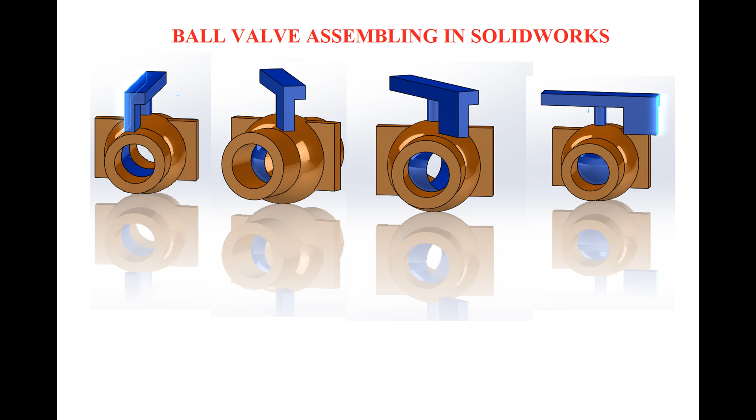Hello YouTubers. Today we're going to be talking about how to construct this valve, this ball valve, in Solidworks.

So I'm showing you how the end product will look like. Here you can adjust by rotating this, adjusting whatever angle you want between 0 degrees, which is fully closed, versus as you open the valve until eventually you get fully open, that's 90 degrees. If you want to adjust something in between, I will show you in the video how to do that.

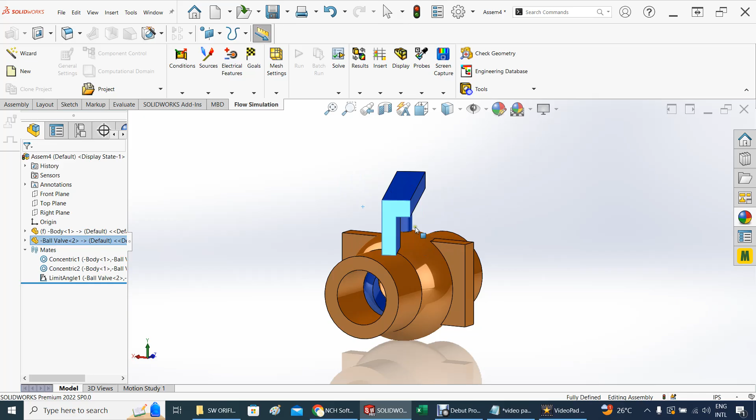But in the meantime, remember that basically we're going to be working on the body, this part here looking bronze, and the ball valve itself, which is the part that you can adjust. So now let me show you how this was done in the video.

All right, so here we are. Let's create our ball valve, and I don't like that background. Let's fix it, plain white. And I'm in inches here, on the front plane.

Let's do a sketch here, and let's do a circle, and that circle should be about 1.5.

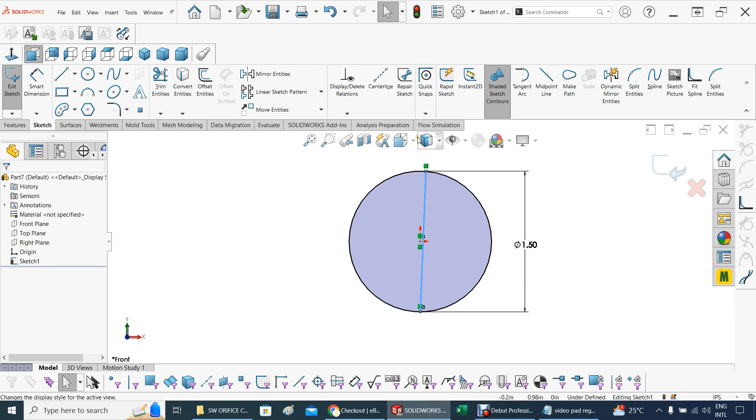Let's create a line, a solid line, from grabbing that point to that point. Now if that line is straight, it doesn't look like straight. Let's see, I want to be sure that it's straight. Nope, what's going on? Let's delete that line for a second. What happened here is that I wasn't working here. There we go, now much better.

Now let's go back again and do the line from here to there. There we go. Now it's straight, and now it's vertical. Good, so now we can trim.

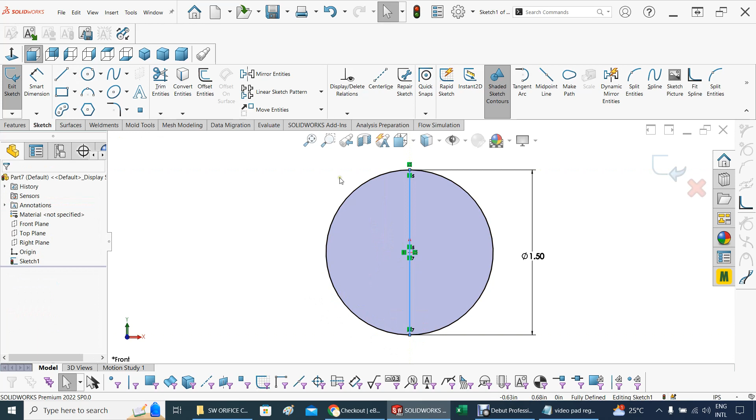And now we can accept that, and we go to features, and we do revolve, and we set that it's going to revolve through this solid line, and we got a sphere there. We accept that, everything looks good, and we're done. So we got the ball valve.

Now let's make the 1-inch hole into it, and for that let's go back again to the front plane. Let's work here, and let's do a circle, and let's get this in the right perspective, and that's gonna be a 1-inch circle.

You may be able to do the thickness of the ball a little bit less than what it is right now, but be careful, because if you make it too thin, then there's gonna show a gap with the body, so you want to avoid that. It looks like to me that that's good enough for this design, so we're gonna accept that.

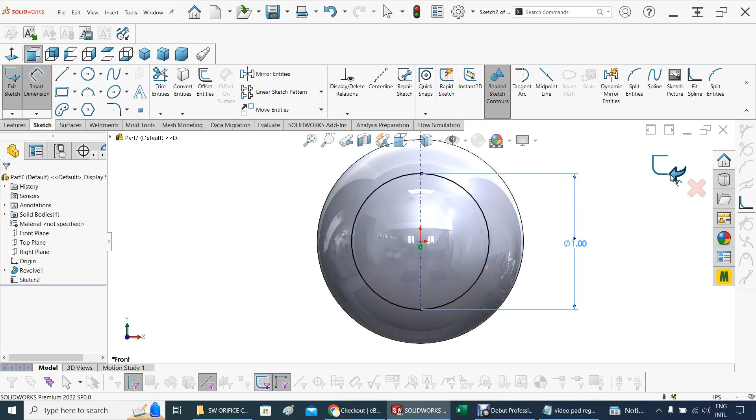Let's go back here, hit sketch 2, and let's go back to, in this case, cut, and we're gonna cut into two directions, both blind. When you do that, you can pull from here, doesn't matter, and accept that, and there we go.

That's your ball valve. And now what we need to do is let's create a body. So one body, and now that's the ball valve.

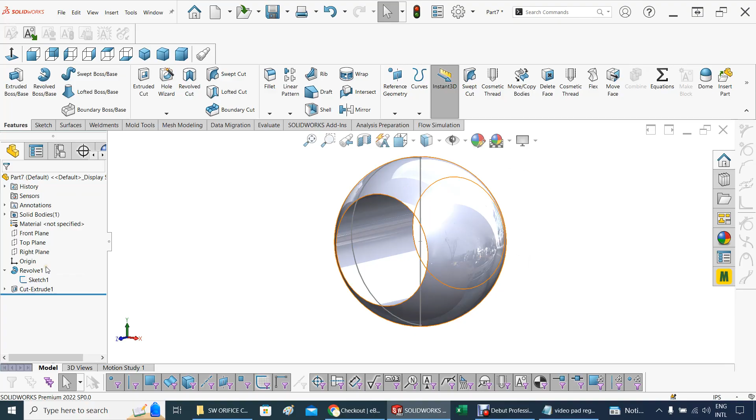Let's go back again, I want to see the first revolve was with that sketch. Let's show that sketch so I can see it. You see the sketch, this one, because I'm gonna work on that sketch.

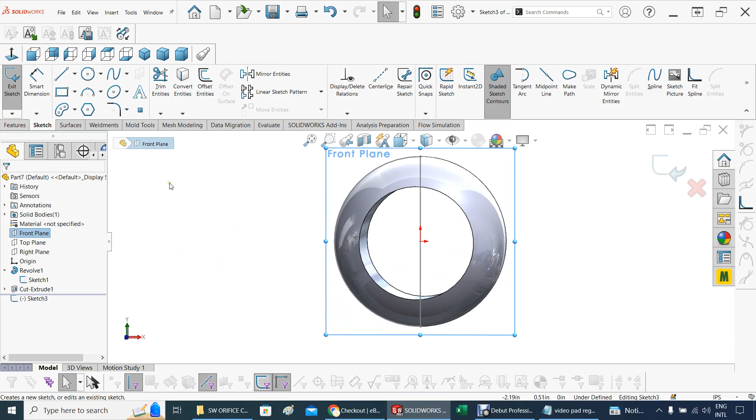So now we're gonna do another sketch on the front plane again, and what we can do is let's convert some entities onto the new sketch, that one and that one. Let's see, I got those two on my new sketch now.

Now that we are still on this sketch, let's make a circle. That circle is gonna be about 2 inches. Let's see, that's super, 2 inches.

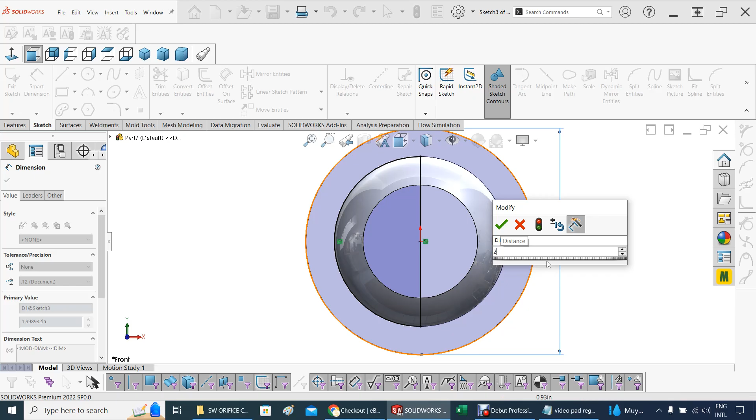And now we're gonna close some distance here between this point and that point, and also between this point and that point there. Good. Now we can trim, we need to trim this guy.

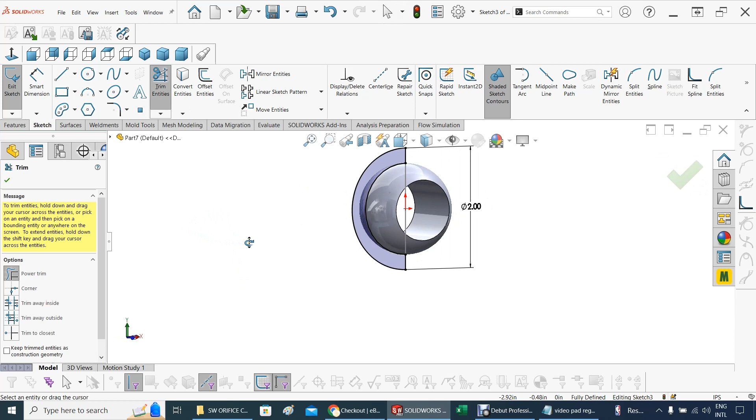And now let's eliminate this line, because that might be creating me a problem. There we go, that was precisely the issue. Now it's working, all right.

So now we're gonna go accept that, and we are ready to do the revolve again. And the line...

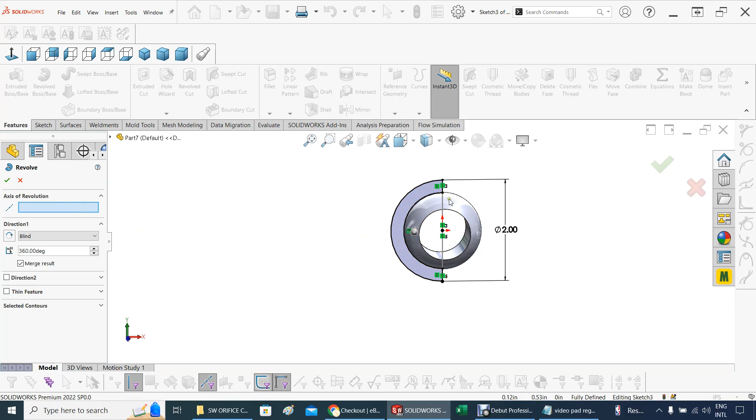Okay, looks good. Actually, let me pick another line just to be sure. I can pick any line. Let's see, yeah, same result, because it's gonna revolve this contour. Let's be sure that the contour is pretty much not out. The merge was active, that was the problem.

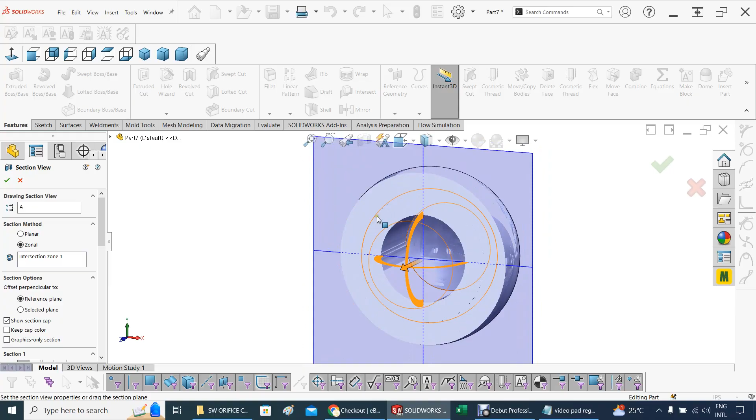Now we're gonna get this out, and we're gonna go again to the front plane and do a sketch here, and let's get this in front. Now I got the two bodies here.

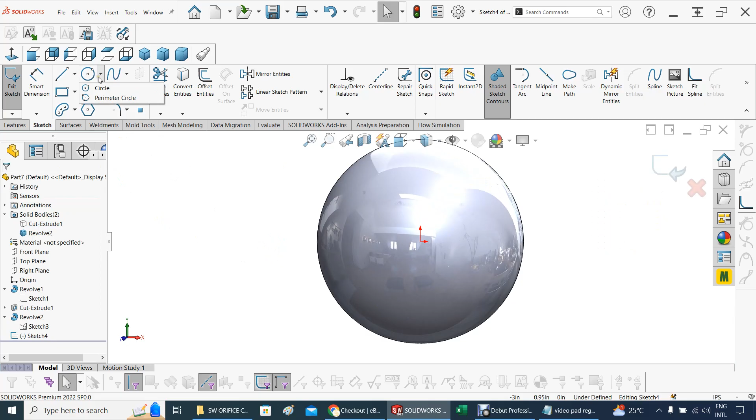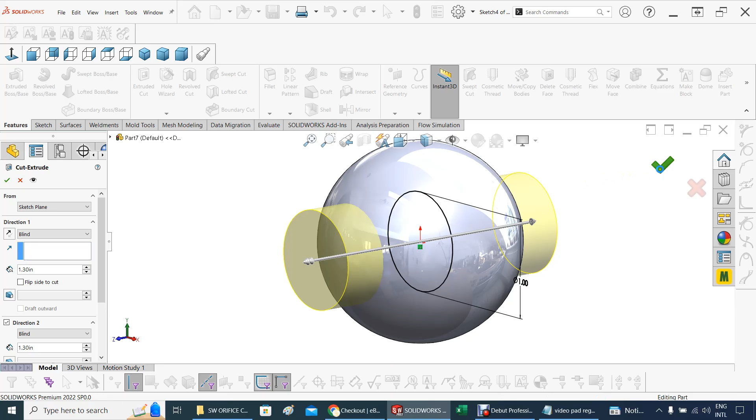Just to do the cut, that's gonna be 1 inch. We're gonna do the cut. For doing the cut on that guy, go feature, extrude cut, and it's gonna be second direction, and that looks good. So we accept that, and there we go.

So you can see where the ball will be kind of inside here on this body. Let's get this, let's show that one. You can see now that looks good.

Now let's work on the stem that's gonna tie into this valve. For doing that, let's work on the top plane, and let's do a reference plane, and I would say 2 inches. Let's see, 2 inches, top plane.

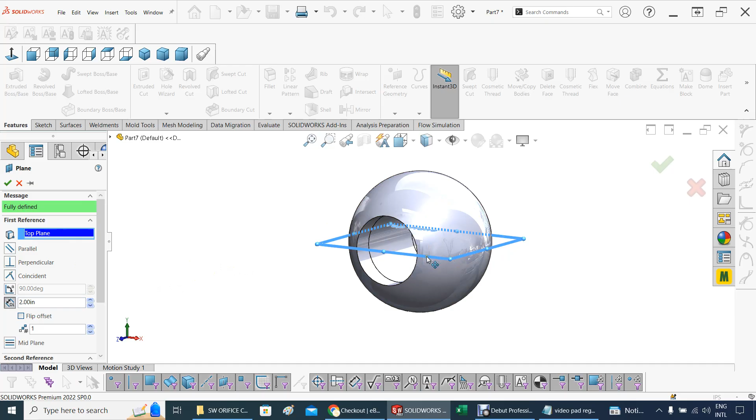Let me show the other part. 2 inches, maybe it's way too high. 1.5, let's give it a 1.5. Let's accept that. And good.

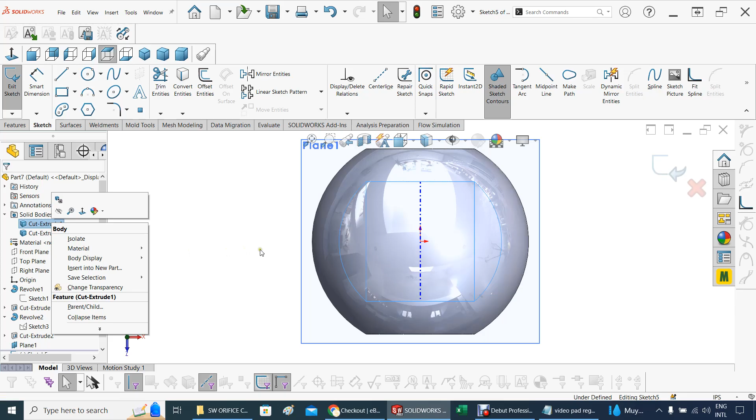That's the body. We're gonna hide the body so we can see that, because the stem needs to be connected here. So let's see, we're gonna do a circle now.

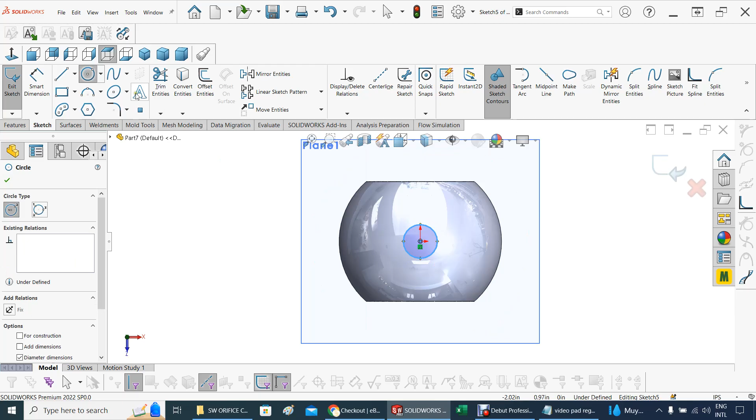What's the thickness of that circle? Let's say 0.3. Good enough.

Now we're gonna accept that and we're gonna land that right here. So we're gonna extrude to the bottom. Now the direction is wrong, but then it's not blind, it's up to surface with surface. That surface, I need to be merged. That's gonna happen. That looks good.

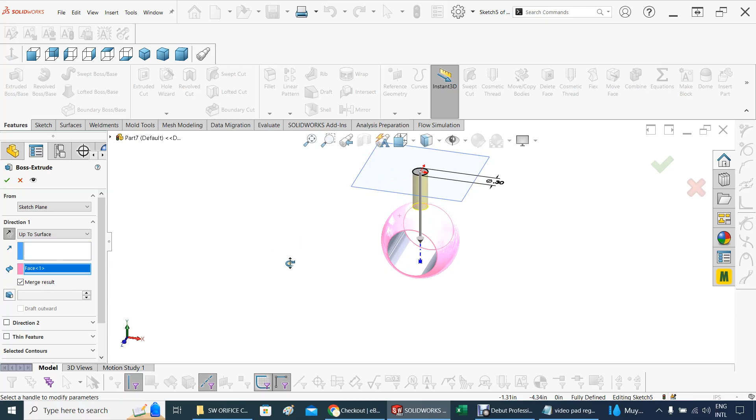So we accept and we say that. We got that, all right. So now what I need to do is put the body back again. Let's see, put the body 1 second here. Let's put the body.

Now you have to make a hole on that body for this guy. So what I will do at this point is, before doing anything, let's not get confused and let's rename that.

That's the, let's see, what is that? Let's see, this one, that's the, all right, this is the ball. All right, so let's rename that guy the ball, and this guy, which is the outside, is the body. We're gonna rename that guy as the body so we know where we are working.

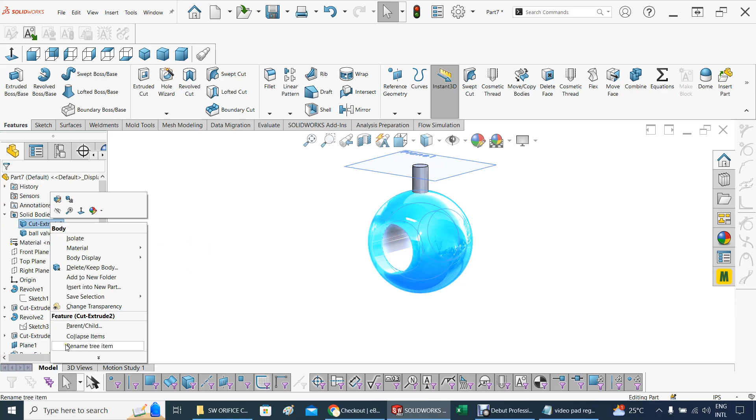So right now I need to work on the body. So the ball valve is out, we're gonna hide that, and now we're gonna make a hole on this guy, straight hole.

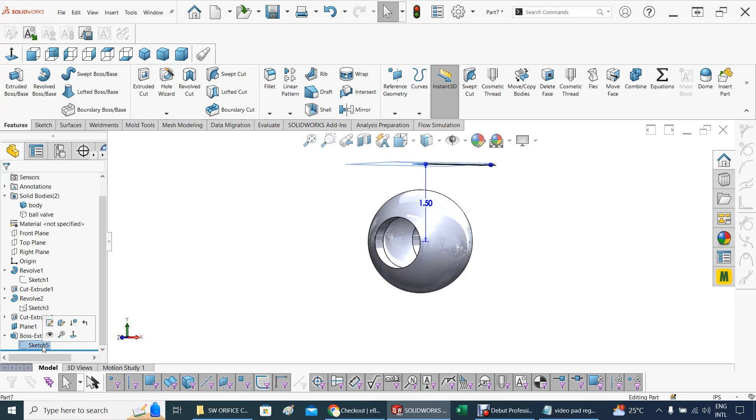So what I can do is go back here to this extrude, and that sketch 5, I want to see it, and I go back again to that plane 1, and let's make sketch there, and on that sketch I'm gonna bring that guy and convert entity. You see, now it's ready to be used for what I'm gonna do, which is the cut.

So go here, extrude cut, and we're gonna go blind, and that's good enough. Let's go right through, and we accept that. So yes, we're done.

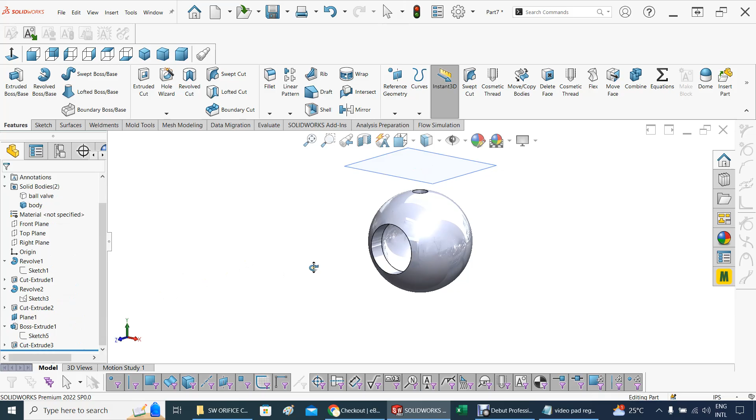Now the sketch 5, we can hide that sketch, and I still need the plane, but that looks good. Now I can put back again the ball right there. See, the ball is going right through the hole that we created here with the same dimension.

Now the only thing that is left is to create, like for example, the direction of this flow is this way. Let's see, put this in perspective. There we go. So it's gonna be a pipe there, a little pipe here, and this is gonna turn a quarter turn for closing and a quarter turn to fully open.

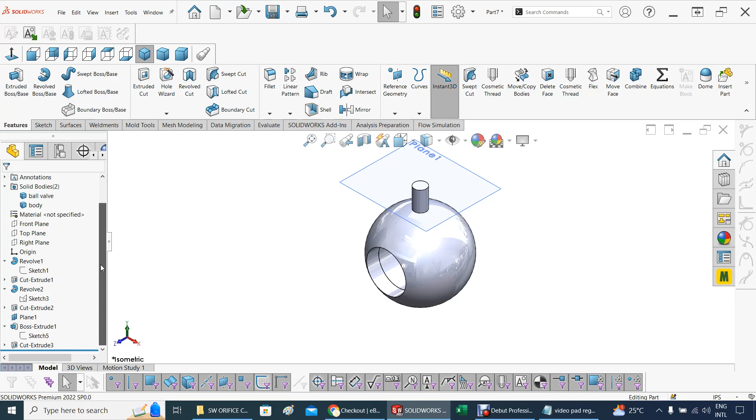So what we need to do now is do another plane, and that plane should be, nope, yes, front plane. So we're gonna take front plane and we're gonna do reference plane, and where I should put that—that's about an inch and a half.

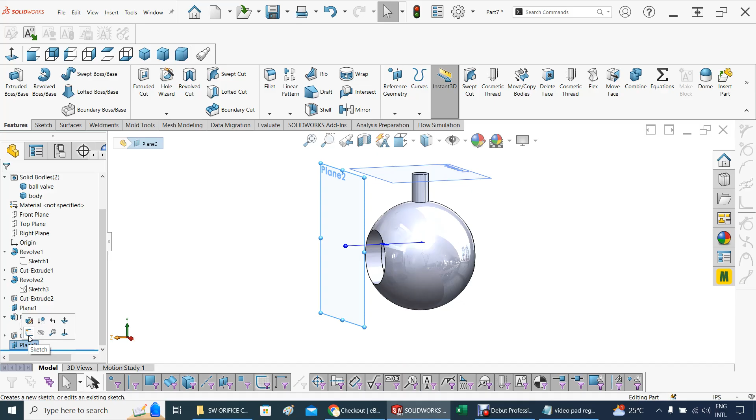All right, inch and a half, that looks good, so let's accept that. Now I got my new plane, and on this plane too we're gonna make a couple things. Let's put this in perspective, and the first thing is bring that guy, convert entity, and now let's do another one.

For the pipe, what that be? That's maybe 1.5, that's thick enough. And the idea is this, that I need to touch this guy here.

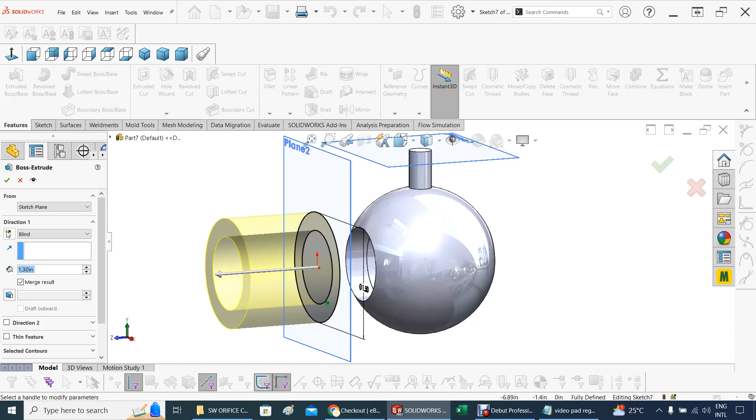So we're gonna extrude, features, extrude. Now extrude what? The direction is wrong and it's not blind, it's up to surface. What surface? That surface. Now be careful here, let's see, selected bodies, alright.

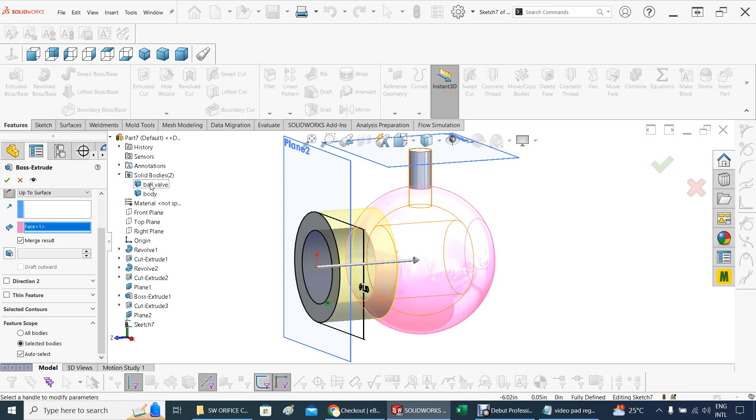I only have, let's see, ball valve and body. Ball valve should be hidden, we don't want problem with that. Let's go back again, but the body, yes, so it should be with whatever is left. So it's gonna merge with the body, not with the ball valve. Be careful there, so when I accept this, two bodies still remain.

Good, which is if I touch the body, see? Now how about the ball valve? Let's put it back, there's the ball valve. Touch the ball valve again, only the internal part are big. If I touch the body, just the outside.

It's very important because at the time for assembling you want to be careful. You want to keep whatever you're doing, you want to keep two parts here. That's it, the valve is basically two parts.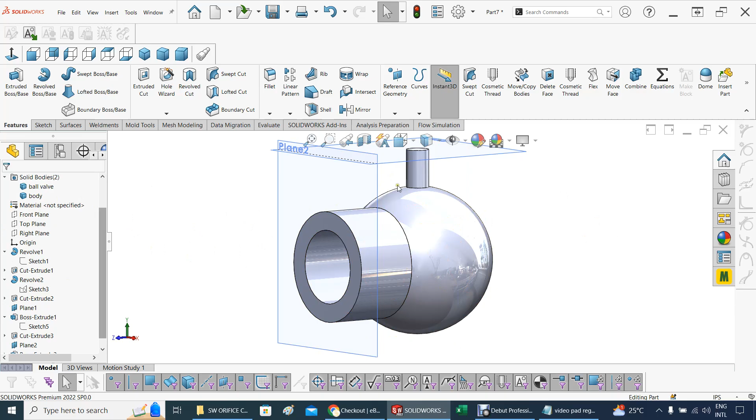Now we're gonna add this way. So the easy way to do that, I can hide some of this, particularly this plane 2, kind of bothering me. There we go. I still need this one to create the valve here.

For the movement, so let's do mirror. On mirror, mirror which plane? Pick the plane from here. Oops, that's front plane, good. And now what we gonna mirror? This guy on the other side.

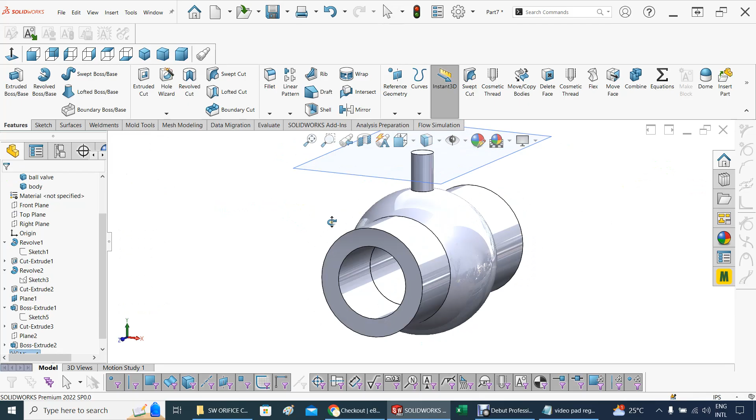So we accept that, and the ball is pretty much done. So now check the number of bodies, two bodies still, good, and that's what it should be. Now the next thing is to put something here just so you can turn this around.

Let's build on this guy. I can use this guy, actually the best way is to use this guy. I'm gonna construct a sketch there.

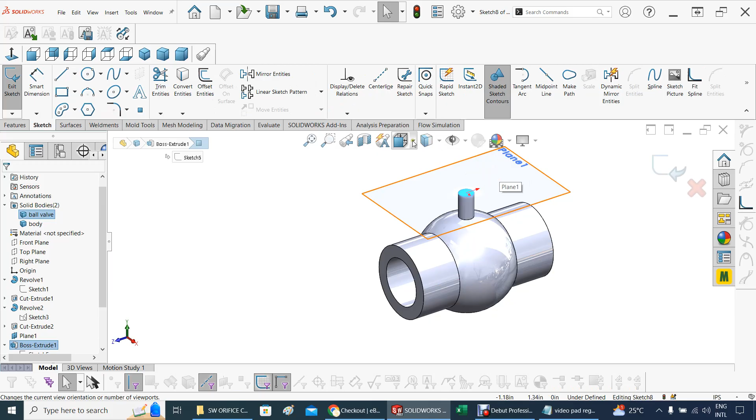Let's get this in that angle, and now let's do the easy center rectangle. Pick it there, and let's make it long enough. There we go, maybe a little bit longer. Good, now let's see, that's gonna be 3 inches, and what is the thickness? 0.5, good.

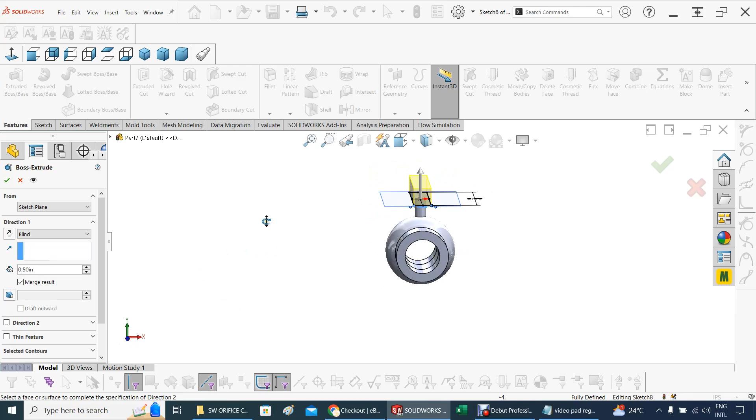And now fully defined, and now let's do features, extrude. It's gonna go up, it's gonna be blind, it's gonna be 0.5 maybe, let's see. That doesn't look good, 0.3, good enough, there we go.

Oh good, so we accept that, and now merge, I need to merge with the ball valve. So we accept that, and now we go back again and hit the body, good, and hit the ball valve. Yes, perfect, so now I can hide this plane which is causing me trouble. And now the ball valve starts to look pretty neat, pretty neat.

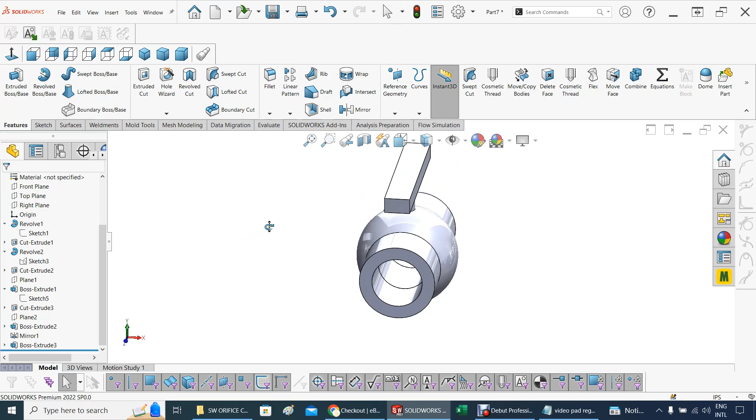One issue with this type of valve is that they turn all the way and it never stops turning. So we're gonna add some kind of a mechanical stop, that when you turn this guy there will be something here to stop with, right? So what I'm gonna do...

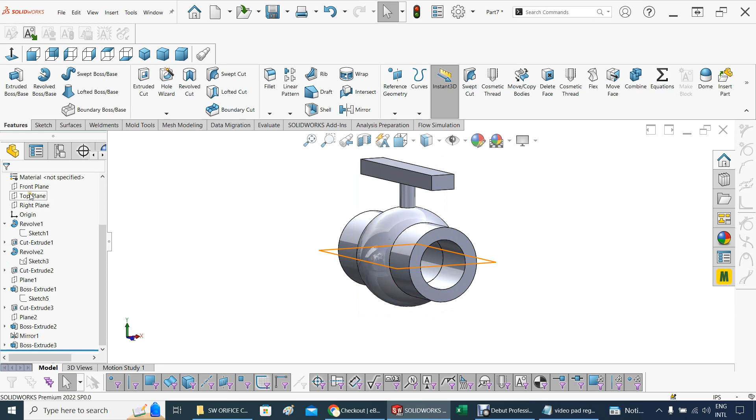Let's see, what would that be? That should be another plane. Let's add the plane, let's see where that plane should be. Nope, nope. Oh yes, that should be the front plane because we're gonna add that here somewhere so it kind of merges with the body.

All right, so let's do a reference geometry here. It's gonna be a plane, and now it can be either side, it's picking this side, you can pick any side. It doesn't matter because we're gonna mirror, whatever we do we're gonna mirror. Now, 1.5 maybe is way too much, 1.25 maybe it's better, we'll see. If it looks too far away, I'll fix it.

And now we go back, and now in that plane 3 we're gonna add a sketch, and we're gonna add a stopper there. How about if I use a corner rectangle?

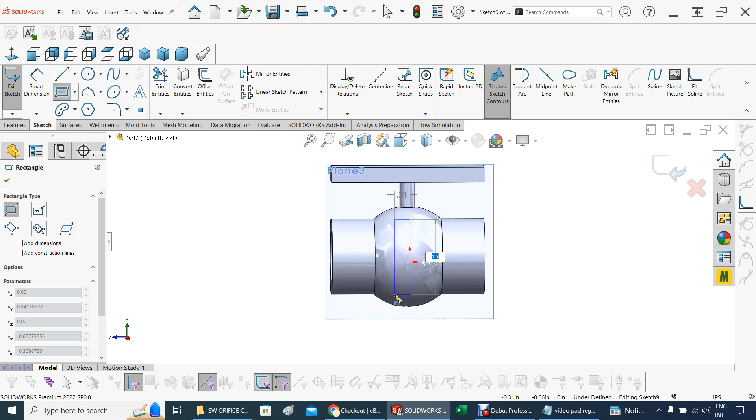The story is, let's see, thick enough and strong so that this guy, when it turns, it will hit it. And you will say, but how will it hit it? Well, I have to add something here as well to hit that guy.

So in that case let's do the extrusion. As you can see, I left that undefined, it doesn't matter at this point, more for the feeling of it. So we're gonna extrude, and with that extrusion you want to go not blind but up to surface, and the other side, and that's the surface. Oops, sorry, blind, no blind, up to surface, that surface, good.

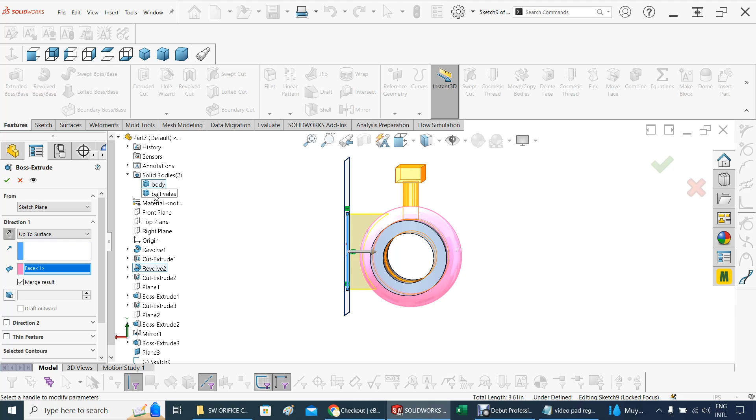Now, careful here, this merge. But definitely hide the ball valve just to avoid any issue. Select the contour, the feature scope, the body. Merge result, accept that.

That's sort of like a stopper. Now let's put back the valve, because the idea is the valve needs to have something hanging that touches here when it turns. Let's put back, let's move this guy, let's move the ball valve, let's show the ball valve, and there we go.

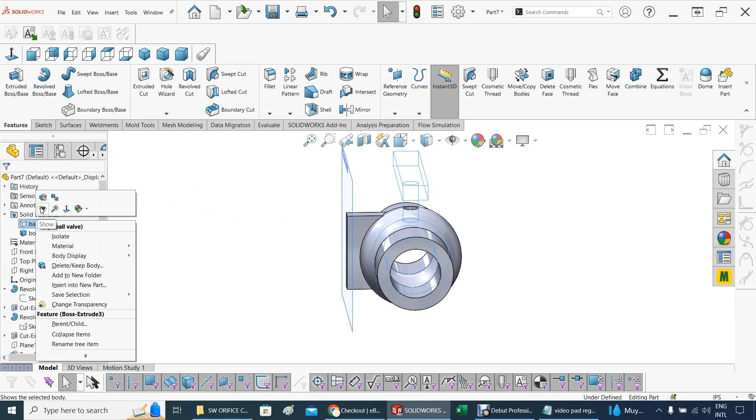So the ball valve needs to have, when it turns, you see, I put this way a little bit more into this way, because basically what I'm doing is I want it to be fully closed. I'm gonna have something hanging here that when it turns, it hits right here. Now, what would be a good distance for that? I would say...

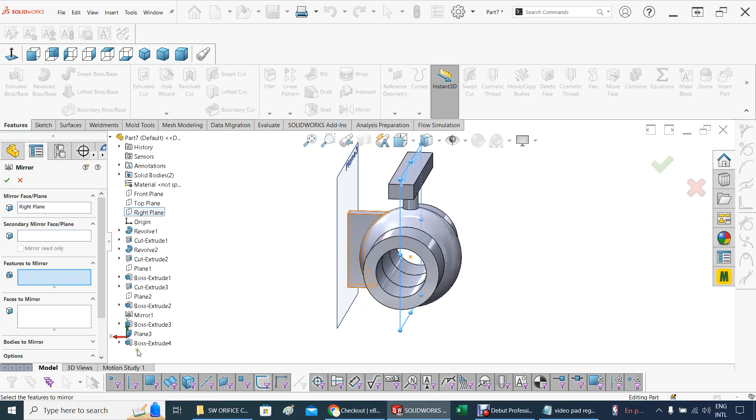Let me add, before I do that, let me add the mirror. Let me complete the mirror here. Mirror, what is it gonna be, no, yes, and we're gonna feature that guy. So we accept. So now I have the stopper on both sides.

That looks good. Now the only thing is, let's add, when it turns, the question is, could that be long enough to touch? Because I want to clear the valve. So it looks to me that that would be okay.

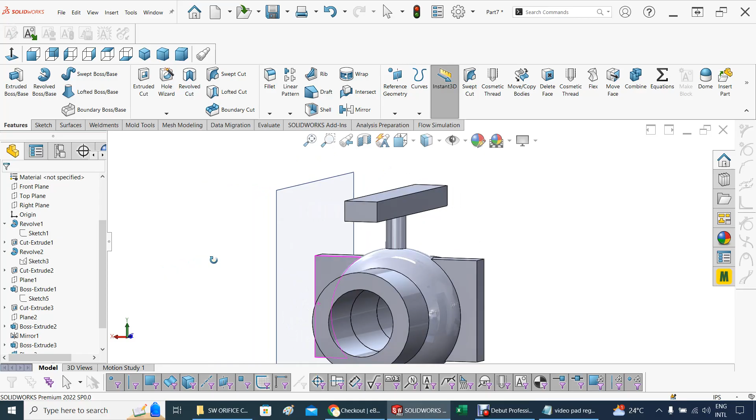All right, so let's pick on this surface. Let's do a sketch there, and let's do... when you turn it around, it's gonna create a mess. So, but let's do a convert entity.

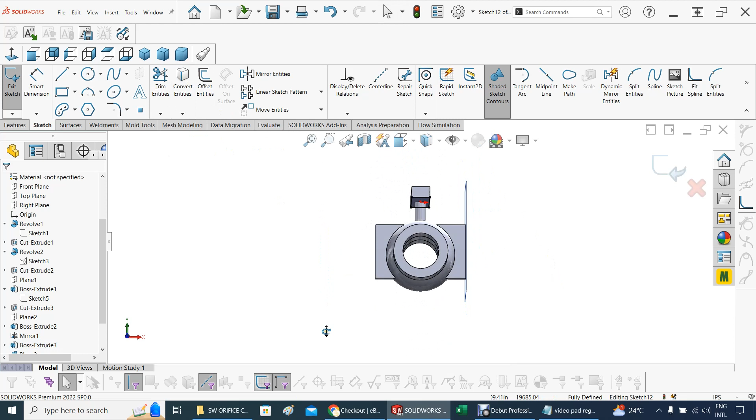So I have that, and now let's see where the stem will be. You see, this part is looking down from the center here, so the stem needs to be here. Now, for this valve to close this way, the 90-degree, right now is 90-degree open. So when this goes here, it will be at 0-degree, meaning that the hanging part here has to be on this side right at the middle.

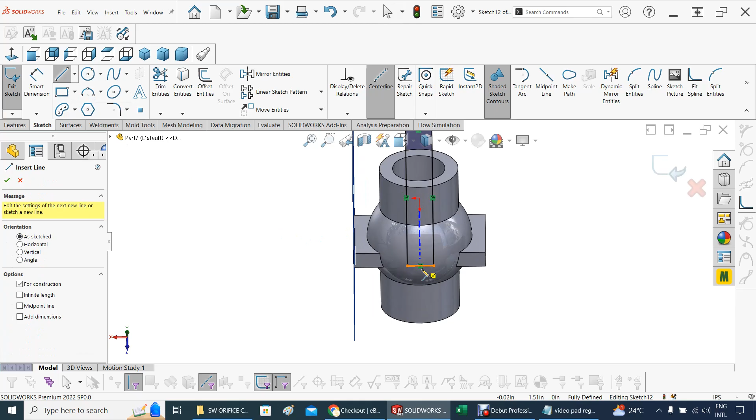Let's throw a center line. Good. And now with that center line, I'm gonna throw this guy, try there, more or less. Let's see what that dimension is just for the record. 0.84, let's make it 0.85 in case I have to change it. Good, and now let's go accept that, and let's feature.

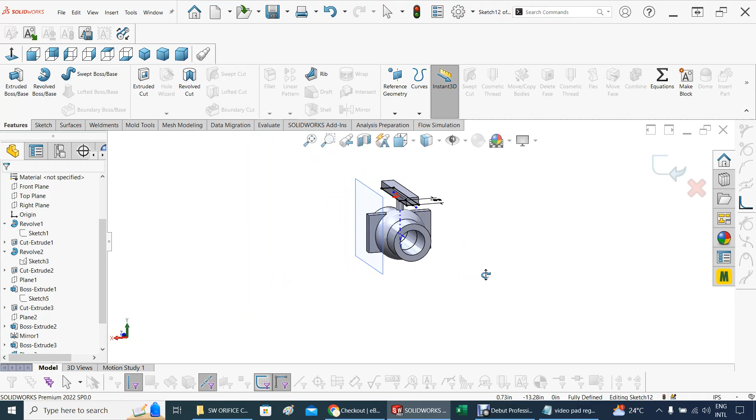Let's turn this around just to be sure that it's in the right position. Yeah, so this valve will turn this way to close. So this part here, let me show you, this part here will stop here when I pull this down.

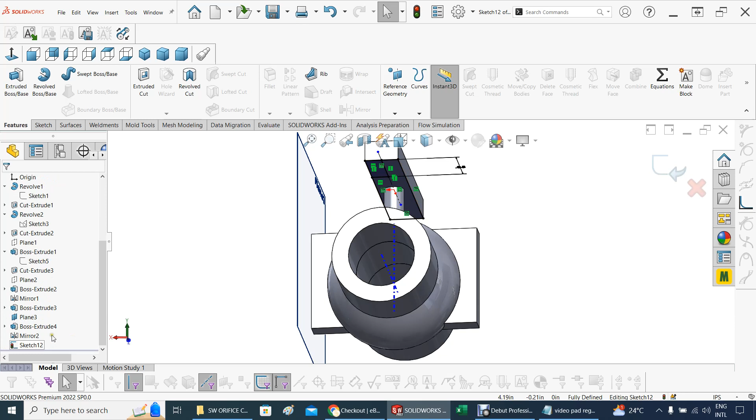So let's do, and we're pretty much done. Let's do now extrude. Now the question is how much I need to extrude, and it's gonna be blind, and we need to identify the contour, which is that part there, and that needs to drop. Looks to me that that's good enough.

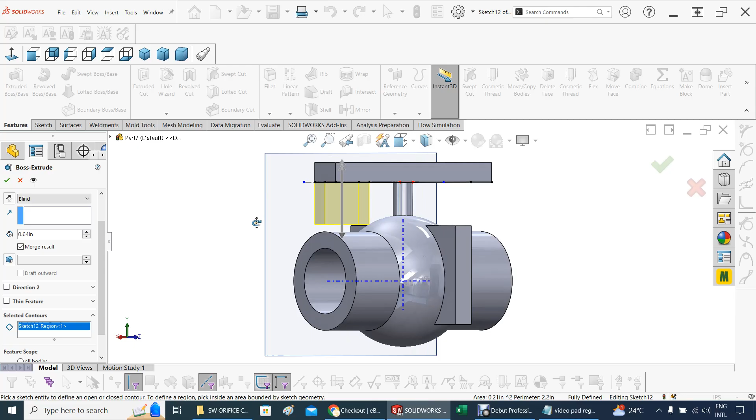Look good to me. So let's accept that. And here's the story. Let's hide this guy, and that's the story. So in other words, this valve will move and hit here.

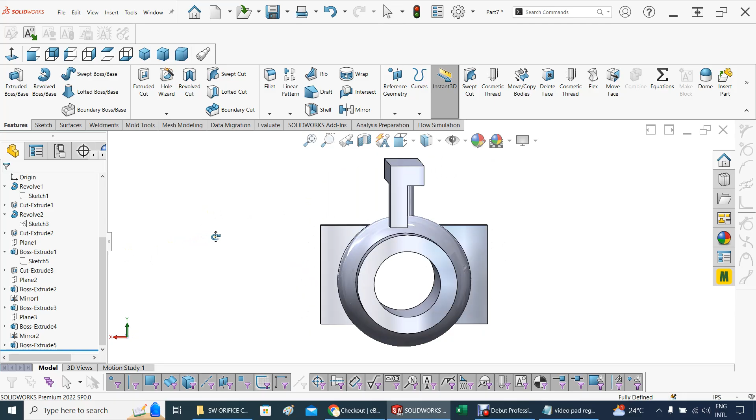The only question that I have is, mechanically speaking, you want this to be the stopper of this. In the assembling that I'm going to be doing, it's not really required for them to stop this, it's enough to indicate the degree, that would be 0 degree, because this is right where this one is. So that's 0 degree. Right now, the way it is, this one with respect to this one, they are 90 degrees apart. The angle between this guy and this guy going down is 90 degrees.

So that's more than enough for me to get this right. So at this point, I would say it looks okay. Could be better, I could make this a little bit longer this direction, or higher if I have to, but leave it the way it is. Another way to do that is to create something that looks more similar to those PVC valves. I try to do this a little bit different, but that's basically it. That's the idea on this.

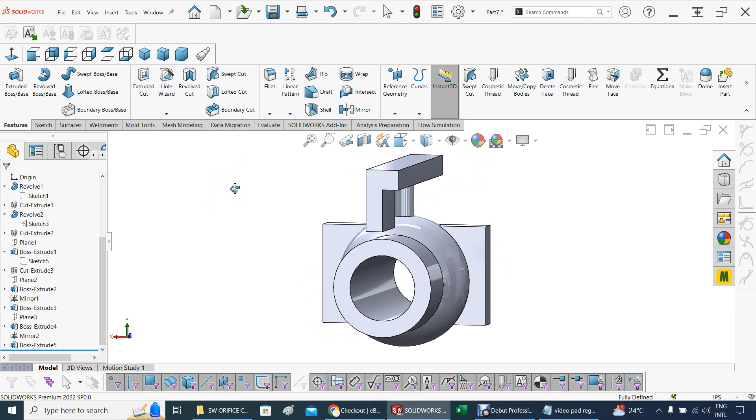So, and I'm checking, did I lose something? Something doesn't zoom right now. Let's go back here because something is not right. See, one body, good enough.

That means this one created the problem? Let's figure it out. One creates a problem, and let's see if it's the last one. Let's figure out this one. That one, yeah, probably has everything. I can see that it has everything.

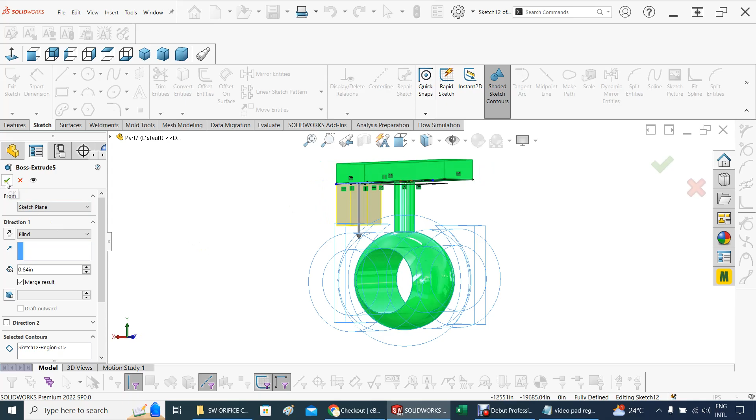So hide, in this case, need to hide the body. And now that's part of only of whatever is left. So let's accept that, and hopefully I still have one body. Which one was done? Let's go back again here. Meaning that was not the problem.

See, I can get this merge out, but that would not be good. Let's see what I got left. See, two bodies, I got that body. Let's see, the ball valve, the body.

Let me check something, it's the last one that's creating the problem. Let's go back here to the sketch and figure out what's going on. Boss extrude.

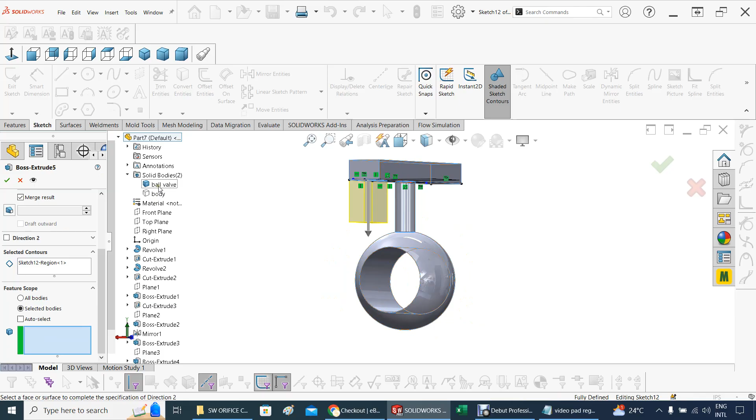The merge is okay. I'm going to do it myself because it's creating a problem. It's going to be the ball valve. See, the ball valve, it's the only one that I want, and I want the merge done on that one. So it's the ball valve. So now it's the ball valve. So we accept that, and I hope now I can see that body there.

How about now? The body. Yes, there we go, that was the problem. Now you can see the line. As soon as I stop seeing this line, this division here, it was clear to me that there was a problem. So now there's no problem. I got the whole thing, and we're ready for assembling part 2.

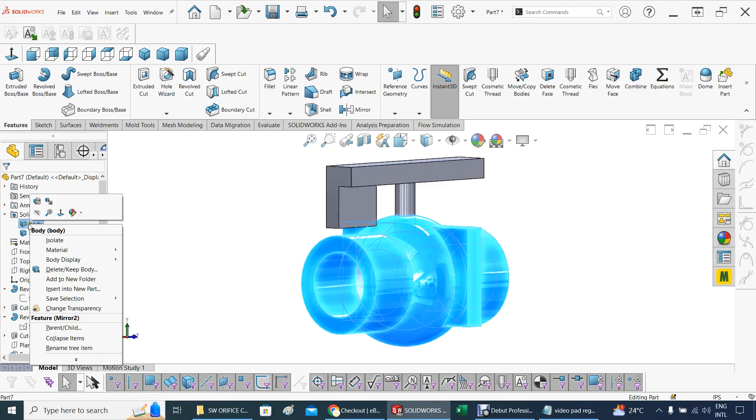We finish here and we move to assembling. Let's see how that would be. So the first thing we need to do is save this guy, the body. Let's insert into new part, and we accept that, and we accept that as well. And let's see, this document, pipe flow project.

Good, so we got the body, and we save that. There's a body, I already have a name on it. Let's say yes, because that's an old body, I'm not using that one. All right, so again, let's take a look.

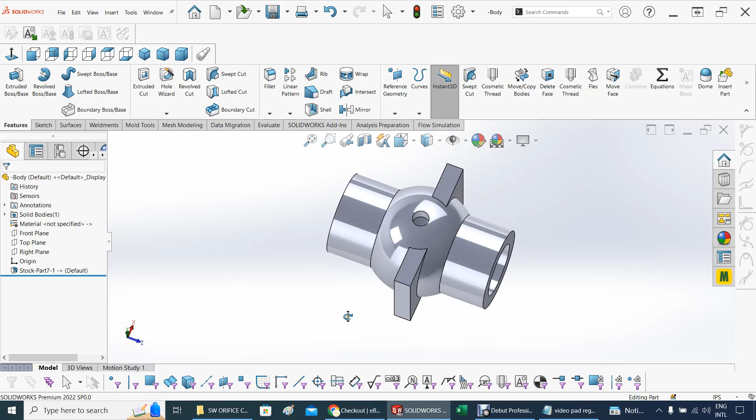Something's telling me that there's something not right, I don't know. Oh, here we go, okay yeah. All right, I got scared because I couldn't see that through. That hole is for the valve, for the stem, and that's showing right there.

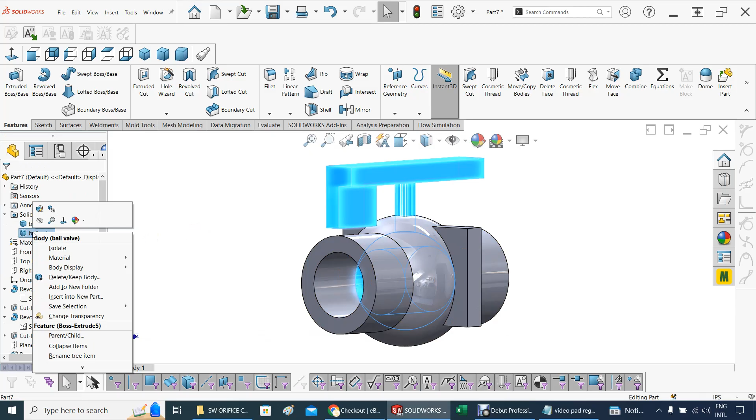All right, good. Now let's go back here again to this guy, and now let's save this guy. We're gonna insert into a new part, accept that, yes, and that's my ball valve, so we save, yes. And looks like we got everything that we need.

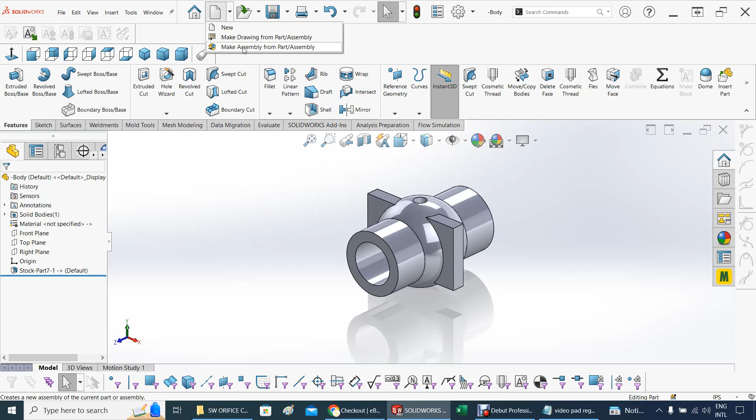All right, now let's go back here for a second. This is a little trick. This is the part that you really want to have fixed on your assembling. So what I'm gonna do is from here I'm gonna create, make assembly, make assembly, and we have... actually, let me delete that one because I don't want that one to be the first one.

And the one is insert component existing part from the body. That's the first thing that I want, is just the body. And the body I want to fix, F is fixed. Good. Now what I have to do is bring insert component, existing part, and that's the ball. There we go, leave that there for a second, and now let's figure it out. Where is it? All right.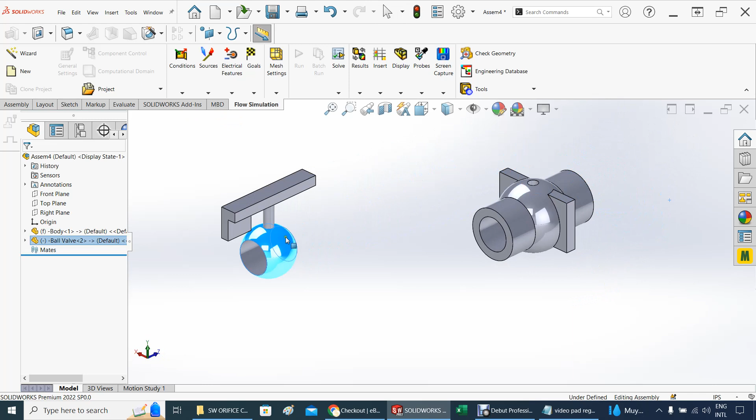Okay, now what I wanted, you see how this moves? But you can do that with this one. I mean, this one is fixed, but this one has a negative here, meaning that it's floating, and you can accommodate it as you want. Now the first thing I want to do is get this far away here.

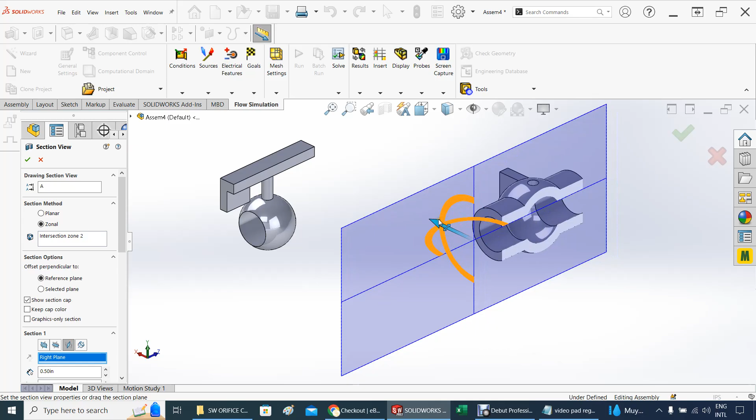Get this active now, put it in the right direction, and start to do a cut so you can see the inside of it. And why do I want to see the inside? Because I want to connect or tie this guy. Actually, let's accept that the way it is. We want to tie this guy, hit control, after that with this center.

Let it go, and you want it to be concentric, like two circles. Now, up to there is okay. The only problem with that is that it's crazy, right? The way it moves, it's not making much sense. To fix this problem... it looks kind of cool, huh?

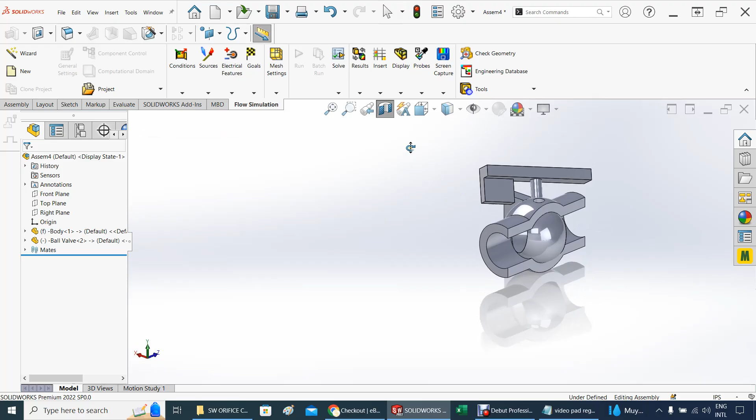Look kind of cool. Well, to fix that problem, it's as simple as hitting this circle here, for example, and this circle, and you want to make those two circles... I'm hitting control, so after the first, for example, hit the first circle, this guy. Now hit control, move around, and then hit control again until you see the other circle. Hit it, let it go, and now you want them to be concentric as well. Perfect, so now you can see that it moved and it locked itself.

You see how nice that gets? That's fully open, and you can fully open and fully close. Now let's get the whole body in place, and you can start to see this part in action, this part, because you wanted to see.

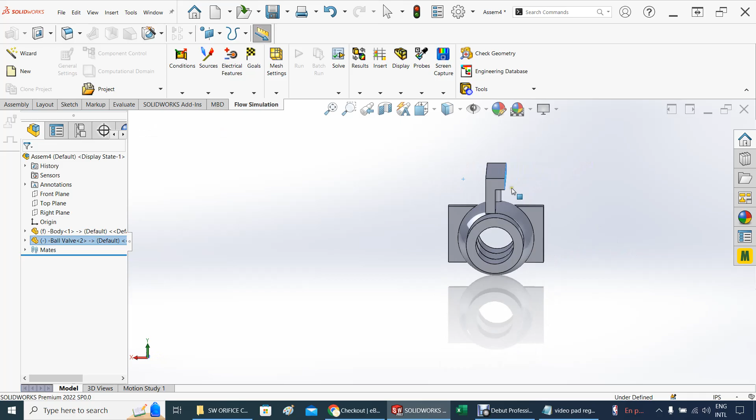This is the story: you want this part and this part to move in such a way that they create an angle, and the maximum angle will be 90, and the minimum angle will be 0. We accept that.

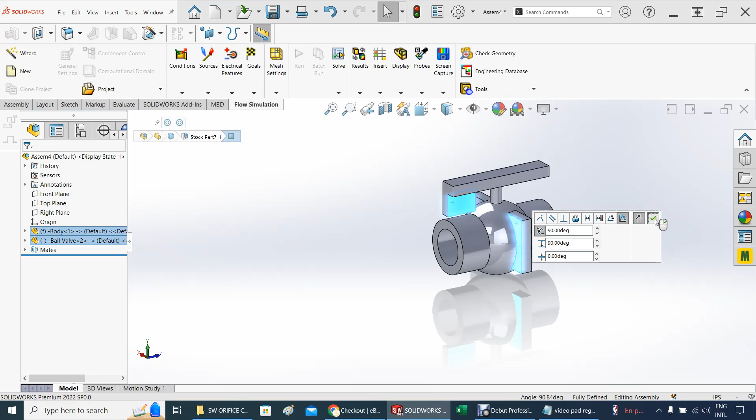Now this is the fun part. Right now it's 90, but I can't go more. You see, that's 0, closed itself. Now I cannot go anymore. I cannot go more than 90, because that's it, and no more than 0.

The idea is, as you can see, they're barely touching, but that doesn't make much sense mechanically speaking, as you have to make... perhaps now I can see better, my final design. That's the nice thing about SolidWorks, you can see whether your parts are integrating properly. I can see that this part, so that you are able to stop this properly...

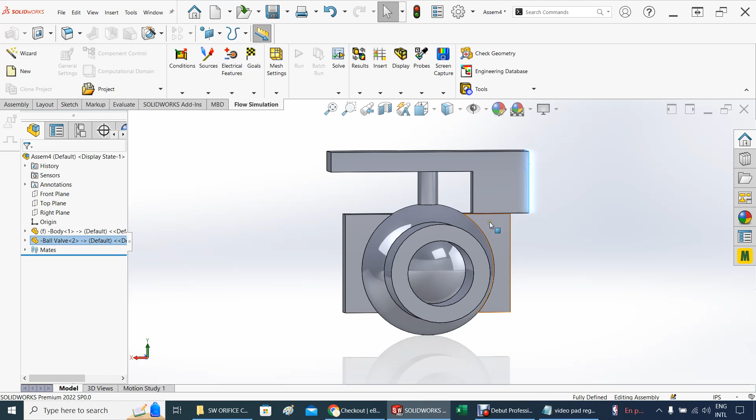This part could be a little bit longer, and this could be a little bit longer as well, so you have a good stopper there. But for this design, the only thing I need to do is go back to my SolidWorks, my original of this guy, which is this one here.

On that one, where I extrude this, go back to that extrusion. I think that was this one, let's do a check on that extrusion, and I set 0.64. Let's say I should drop it a little bit more, not much. Then let's see, 0.70. That's good enough, let's accept that.

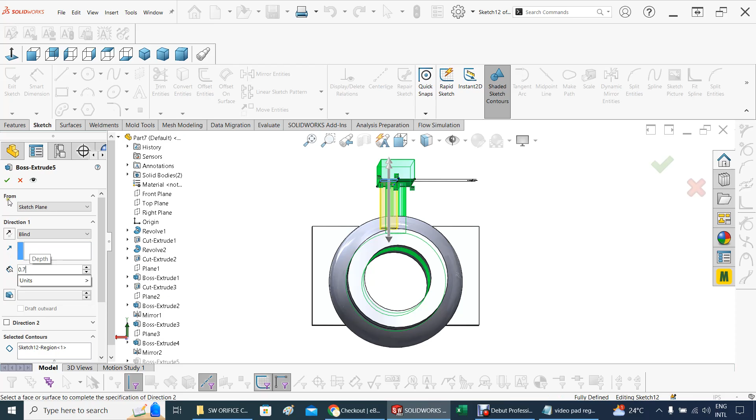Now what's gonna happen if I go to assembling? Let's see, it will tell me something changed on your model, so let's say yes to action. You see how we kind of grew up the other part? Now they're touching, now they're perfectly touching, so definitely it's a stopper there, a mechanical stopper.

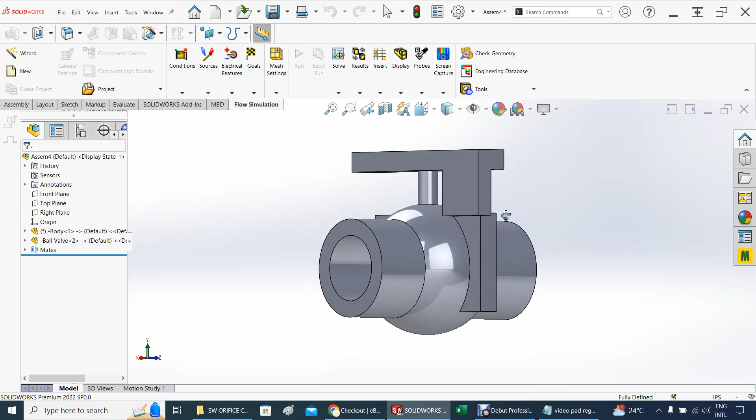Could make it look better, but the idea is to create something that really looks good, and this will stop the movement, because actually it's mechanical. Although I did it by software, basically by indicating that the only opportunity for this valve to move is from 90 degrees fully open to 0 degrees.

See? Now that's one limitation. One thing you could do is, for example, put this valve at different degrees. Let's say you want to open this valve like 10%. 10% from closed will be something like this, barely opening. You see this minor opening right there, 10%.

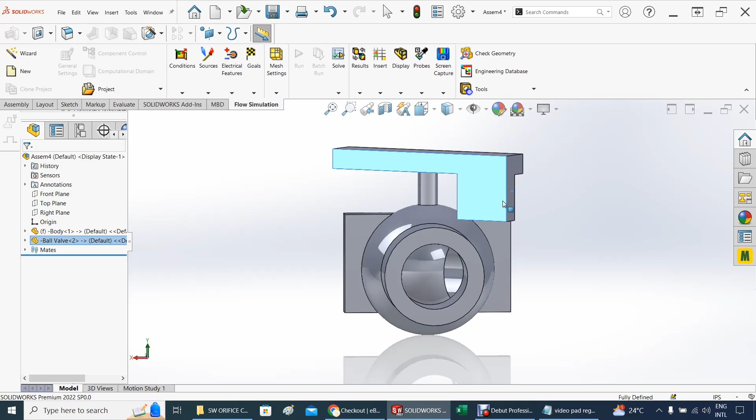You have to put it yourself, and that would be hard to adjust without having the machine do it for you. So let's put the machine to work for us. In order to do that, what we need to do is add another mate here, between this surface again and this surface.

When I hit this surface, I hit control, then to move this I stop hitting control. But when I'm gonna select the other surface, I have to hit control again, let it go, and now you put the angle that you want.

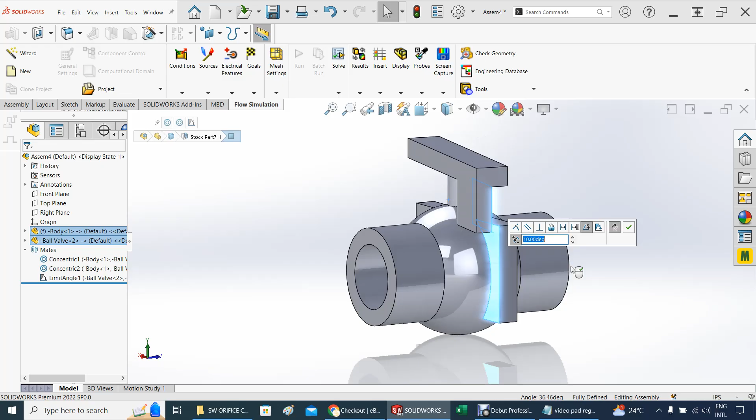For example, right now I want 10 degrees, so you put 10 degrees, accept it, and it moves 10 degrees. Let's accept that here and see what's going on. You see, barely opening, that's good enough. That's basically how this works.

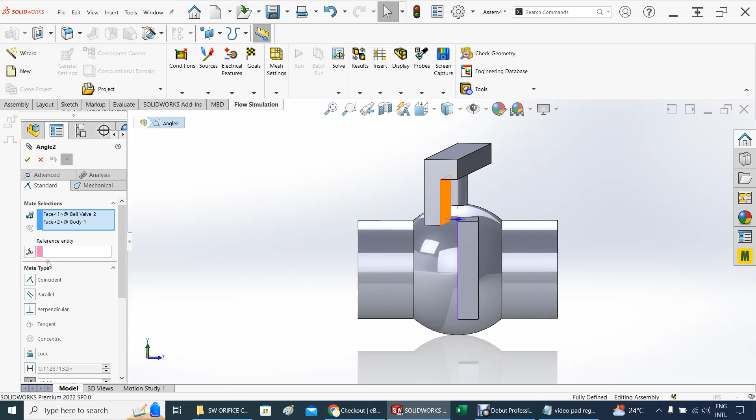You can adjust any other angle that you want. For example, you want to do 20 degrees, so you again edit this and put the distance that you really want. Let's see, where is it? Sometimes it shows where it went. 10 degrees, let's say, I don't know, 20 degrees. You got 20 degrees, so it opened a little bit more.

So let's accept that, and we got 20 degrees. So you can see the flow will go right through and come out right through here. All right, so you want to see the inside of the valve, how that looks like. This is what's going on.

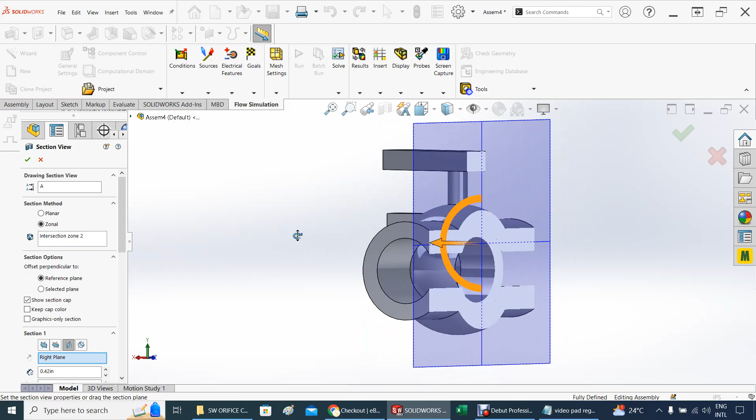Oh, that sounds good. Well, that's basically it. This gives you a very, very good way to control the position of your valve and do flow simulation with the rest of whatever you're doing.